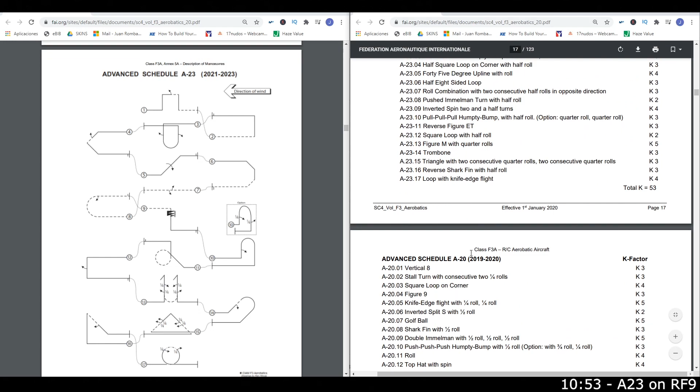You will find on page 31 the Aresti of the A-23, and on page 17 the maneuver names and also the description of each maneuver. After all these years in F3A, I think with the Aresti I have enough, but in case I have any doubt about the maneuver, I always come here to the sporting code, to the description of each maneuver, and read it carefully, because sometimes, depending on the quarter rolls, opposite directions, or the Humpty Bumps, it's very useful to read them all.

As this will be the first time doing this schedule, I think it's very important to try to analyze the schedule you are going to perform. So we can have a quick look at all the maneuvers to see that everything is clear, we don't have any doubts, and we can go to the field or to the simulator and try this out.

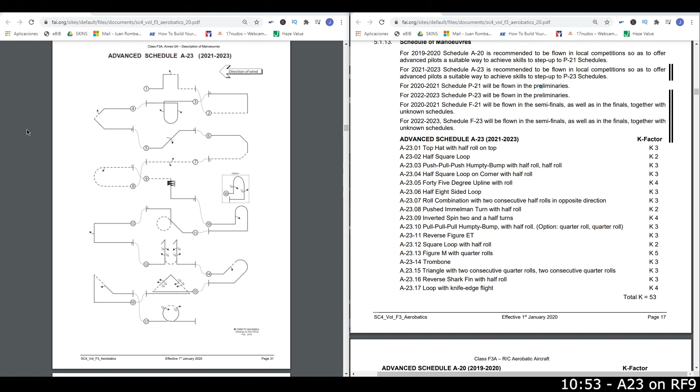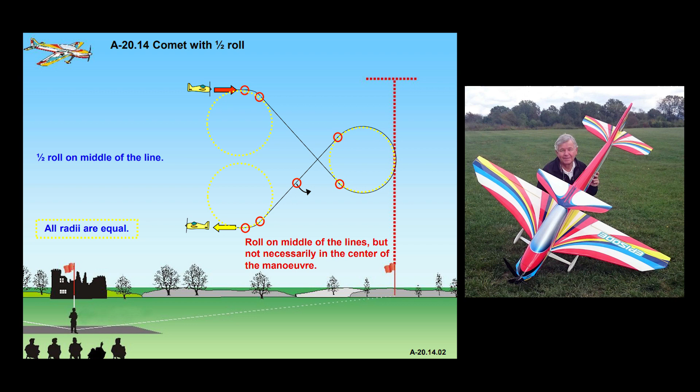Just one thing, I was editing this video, and I would like to say that Peter Uhlig, the chairman of the F3A, makes every year a PowerPoint with every single maneuver of all the schedules. This is amazing work for our community, and you can really learn from it. All the judges look at it, every pilot, they are super useful. There is a complete description for every maneuver, and once the A-23 is online, I will try to share it with you in this video, or if you are interested, you can always try to contact me, and if the link exists we will try to find it because they are very useful.

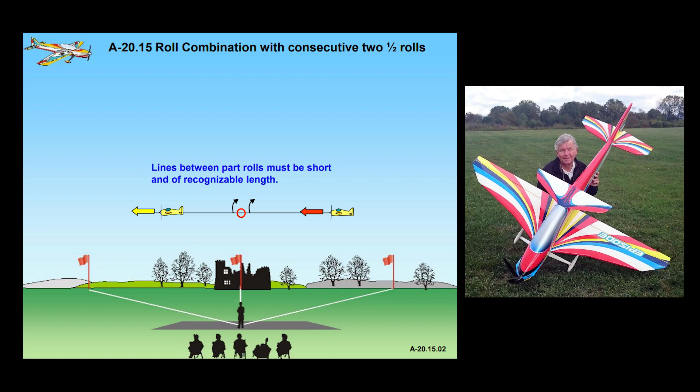But this is just a first look made by myself here with my simulator. So again, thanks to Peter Uhlig for all the hard work during all these years doing the PowerPoint. So let's continue with the video. I will quickly comment on each maneuver, looking at the Aresti, and in case we have any doubt, we will check the description of the maneuver.

So we start in the center with a top hat with half roll on top. Easy.

I think it's quite clear, there's no doubt in this maneuver. We have to keep the same radius on each corner, then perform the half roll in the center of your window, define very well the horizontal line before and after the roll, and that's it. Then we exit in inverted flight to perform a half square loop. Again, simple maneuver, not a big deal.

Then Humpty Bump. This one can be more confusing. Always with the Humpty Bumps you have to check the description, because sometimes there are mistakes in the aresti, or it's not clear. So if you have any doubt, let's go to the description. As you can see, it says push, pull, push.

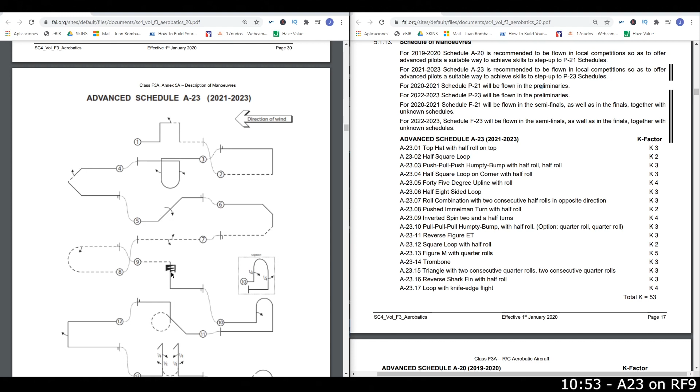Then in inverted flight we have to perform a roll combination. In this case it's two opposite half rolls, so remember that as they are opposite you have to rebound between them. Then Immelmann, inverted Immelmann with a half roll on top, 2 spins and a half, so 2 turns and a half, marked by these 2 big triangles and the small one is half.

Again, Humpty Bump, there is an option here, check the description. As you can see, the normal one or the first option is pull, pull, pull, so very easy to remember. Just pull the stick towards you and you will be fine. Half roll on the first vertical line and nothing in the down line.

Then the ET maneuver. In this case, as you can see, it's not a symmetric maneuver, but you have to center it. So we will start the 45 degrees before the center, then perform this loop and go up in the center of your window. Remember the radiuses and the angle, and in this case maybe we'll have to use a lot of power, or more than normal, to perform a very vertical and straight line in front of you.

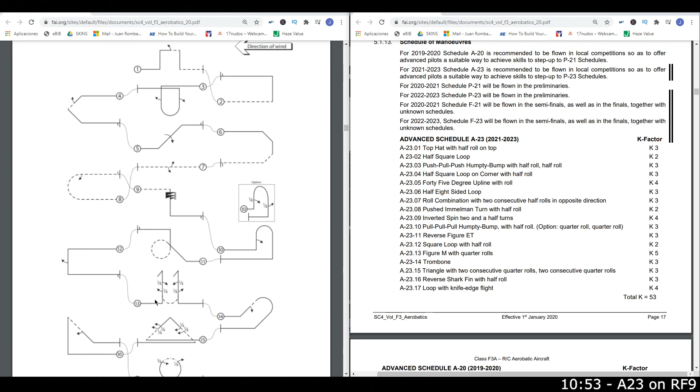Then half square with half roll, remember to mark the lines before and after. And here we have the K5 maneuver.

Let's take a look at this maneuver because it's quite tricky to understand using only the aresti. As you can see, one can have doubts because you go into a vertical downline and then what? I perform 2 quarter rolls in opposite direction, then there is this dashed line, in the other one the same.

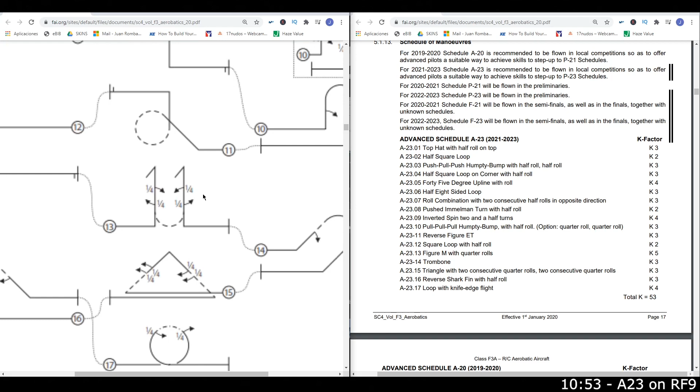So in this case it's better to go to the description of the maneuver, number 13. We have it here on page 21 of the sporting code, and read. It says: from upper right, pull through a quarter loop into a vertical upline. Yes, we knew that. Then perform a quarter roll, then perform stall turn.

So now it's more clear. We have to make only 1 quarter of a roll and then perform the stall turn on top. Then in the vertical downline it says perform again a quarter roll. In which direction? Well, then we have the dashed line, which indicates we have to be in inverted flight.

So if we continue reading, it says push through a half loop into a vertical upline. Okay, so the downline with quarter roll has to position your plane to push and then make this half loop passing through the center of your window.

We will see it more clear in the simulator, but this is a clear example of how useful it is sometimes to read the maneuvers to really understand how the maneuver is, because in this case with the Aresti it's quite difficult to understand. Okay, next the trombone.

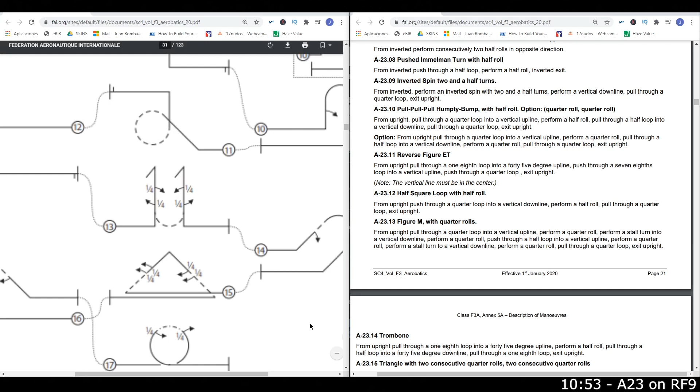It's like the tilted Humpty Bump. Then triangle, keep the same radius. In this case the quarter rolls are in the same direction, so you have to make a pause in between both, in the up 45 degrees and in the down.

Okay, same radius, the shark fin. And the last maneuver, which I think is very nice, is a loop with a knife edge on top. I will show you in the simulator that maybe it's not as difficult as it looks, but it's a very nice maneuver.

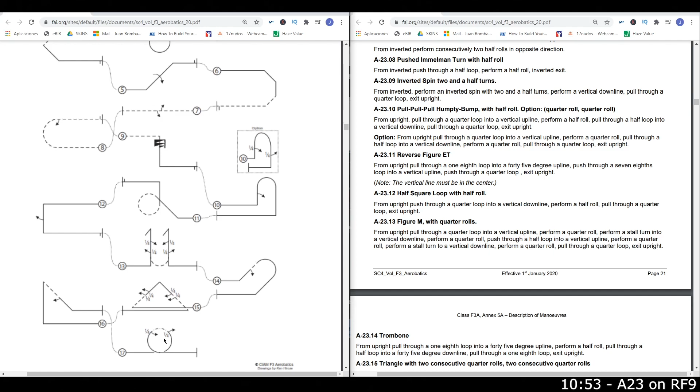Okay, so well, here we are in the simulator. I prepared this setup with the Aresti schedule on the right side of the screen, because I don't know the maneuvers and this is the first time, so please keep that in mind.

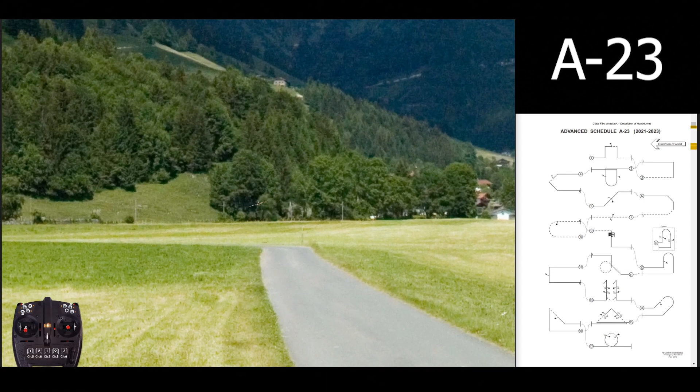I hope I can bring also this schedule in real life with the Cosmic to show you with the stick cam. But yeah, this is a first approach with the simulator, very useful I think for anyone thinking of doing this one, and I hope it helps someone.